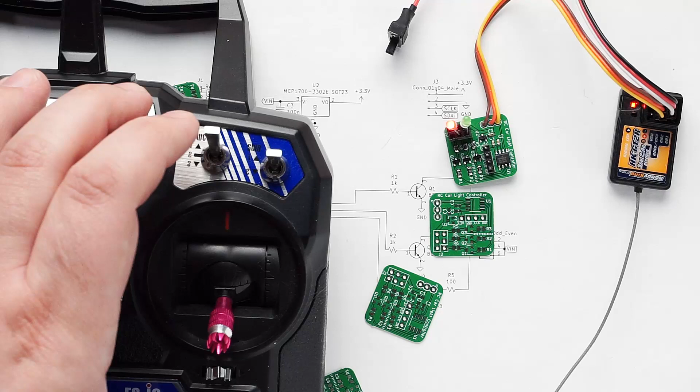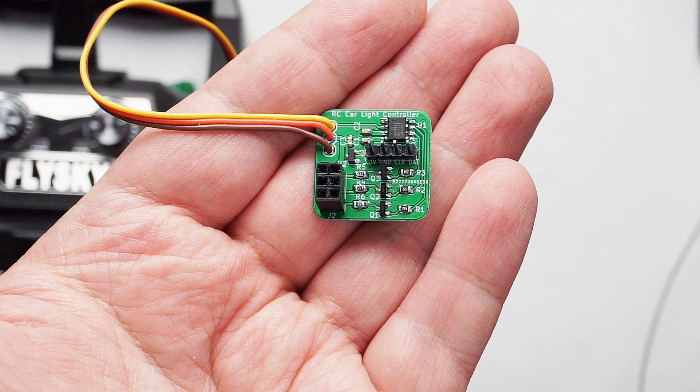Finally it works. Hello, what I was doing there was testing a light controller I made for RC vehicles and robots. I'm controlling some LEDs, but the same method could be used to control more complicated things as well. The main point of this project is to get the signal from the receiver to the microcontroller.

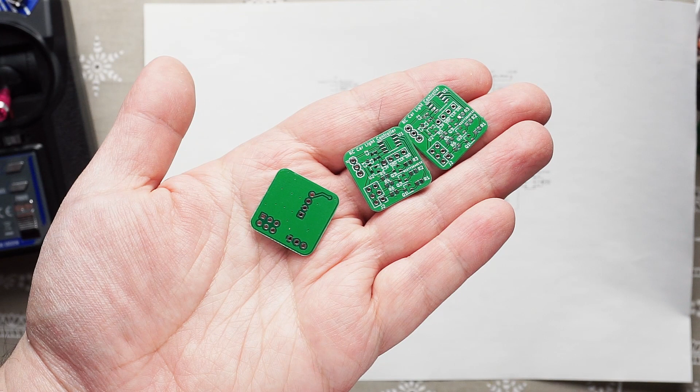The microcontroller in this case is a PSOC 4 chip. This board also includes a 3.3 volt regulator and 3 sets of transistors and resistors for external LEDs. I designed this PCB to do one thing, and that is to control 3 sets of LEDs. If I have an RC car that drives, I can add this circuit with LEDs and have controllable headlights.

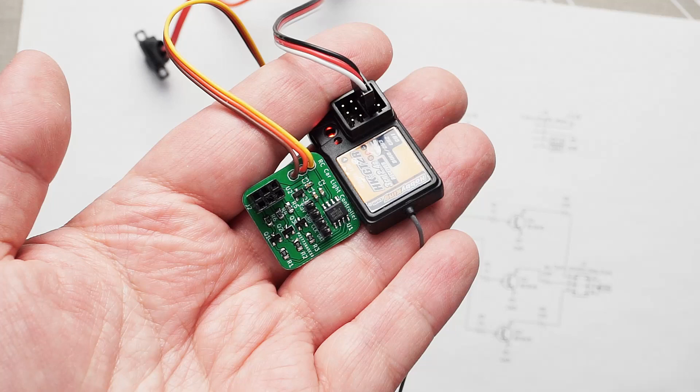By following this video, you should be able to read the signal from the receiver with the PSOC chip and use that information in your projects as you will.

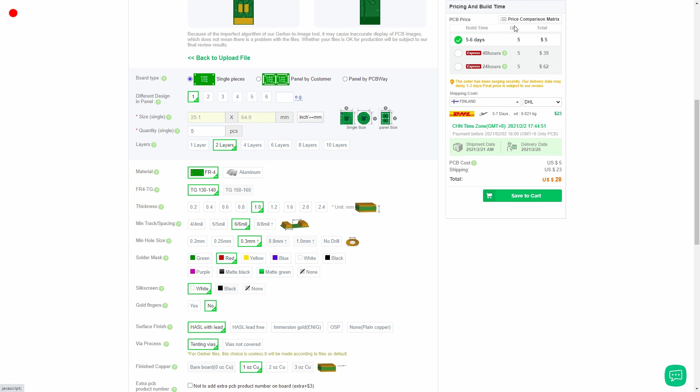I really like the PSOC 4 line of microcontrollers from Cypress. This cheapest PSOC 4 chip doesn't have many of those advertised advantages of most other PSOC chips, but it is still a 32-bit microcontroller that can be configured using the same PSOC Creator IDE, which I like.

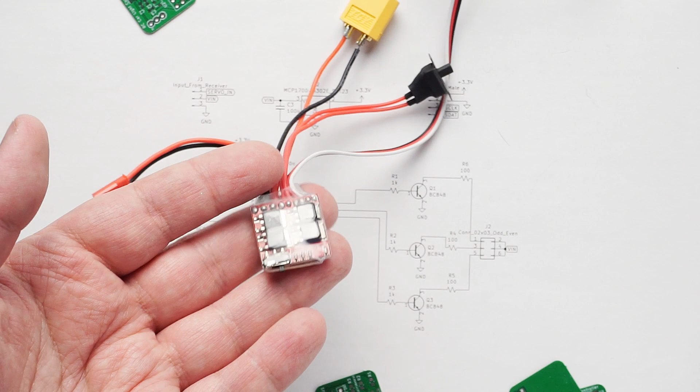In case you are not familiar with RC devices, the RC receiver outputs a PWM signal with pulse width between 1 millisecond and 2 milliseconds depending on the position of the switch or potentiometer on the transmitter. This signal is good for an electronic speed controller or servo motor because they have a decoder inside them translating incoming pulse length into a certain speed or position. But this signal isn't any good for driving LEDs, not without some kind of decoder in between.

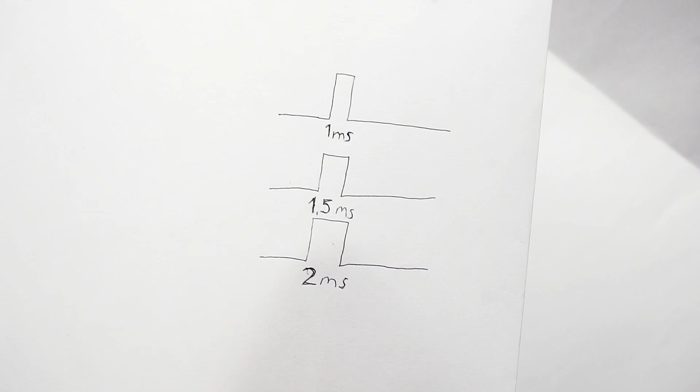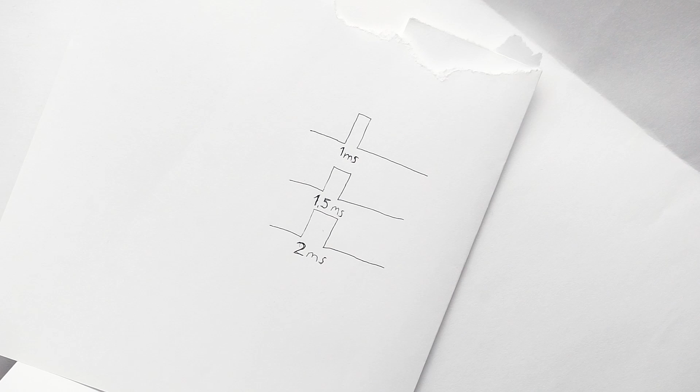Thankfully, this signal is simple, so we can read the pulse length and use that as a variable in our microcontroller's code. In this case, I'm going to set up the input signal to control the timer in a way that will trigger an interrupt at the falling edge of the pulse, and the pulse length is available immediately after the interrupt. Hardware will handle restarting and reloading the timer. In the code, we just read the pulse length value and use it as we want.

So let's get started with the software. In PSOC Creator, let's create a new project, select the correct device and an empty schematic as a starting point. Even this, one of the simplest PSOC chips, can be configured using this schematic editor by dragging components from the list to the schematic sheet. For this project, I need a timer in capture mode. Timer can be found under Digital and Functions.

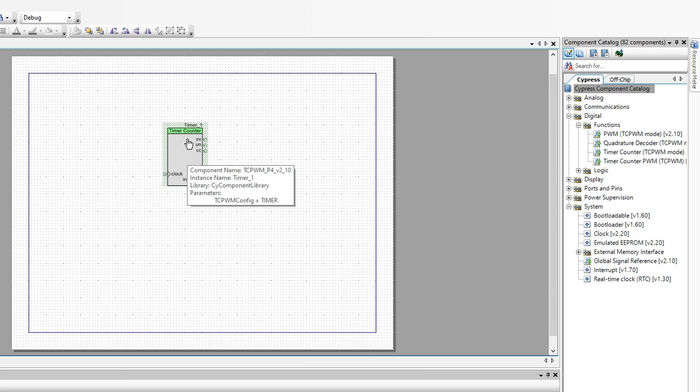This timer will be used to measure pulse length. Run mode of the timer should be one shot because it only runs during the pulse. Rising edge on the input should reload the counter with 0 and start the timer. Falling edge should capture the current value of the timer and stop it. I need to expose reload, start, stop and capture pins to the schematic. Stop and capture inputs should be changed from the default rising edge to falling edge to match our requirements.

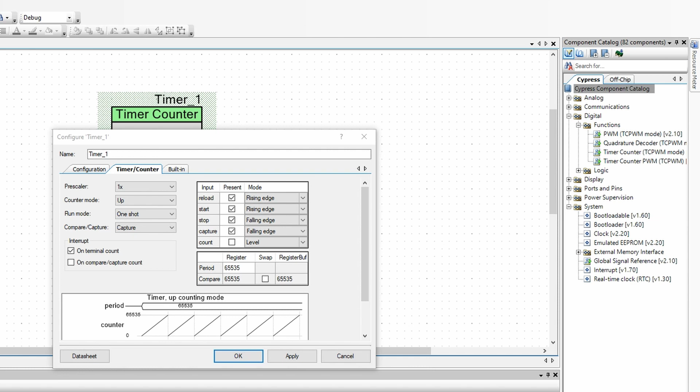I will also change the interrupt settings to trigger interrupt on the compare/capture count. This component needs a clock as an input. It can be found under System. The frequency of this clock isn't all that important, but it affects the captured counter values later on.

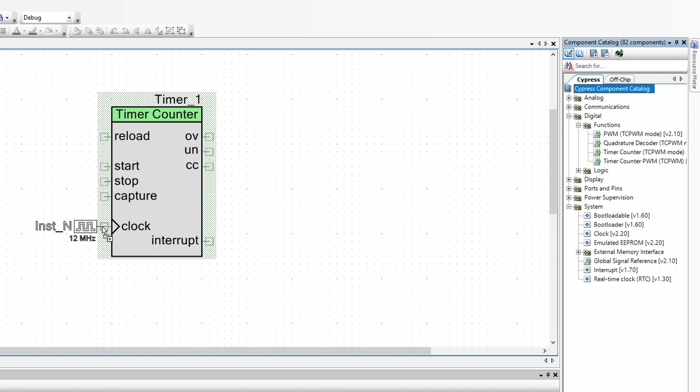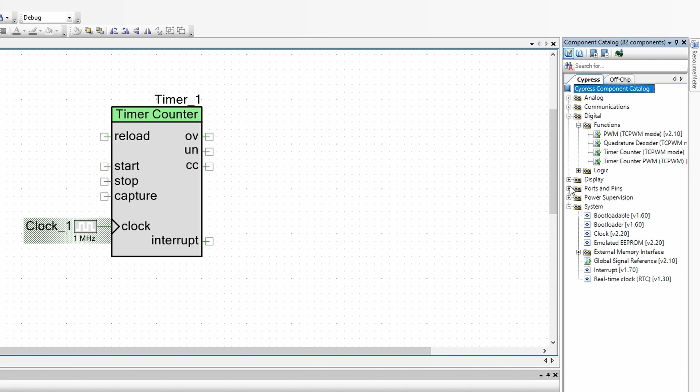I decided to use 1 MHz, so 1 tick is an easy to understand 1 microsecond, and thus servo signal will be represented by counter values from 1000 to 2000. The timer is now set up correctly and I need to add input and few outputs. The input can be digital input pin under ports and pins with its default configuration.

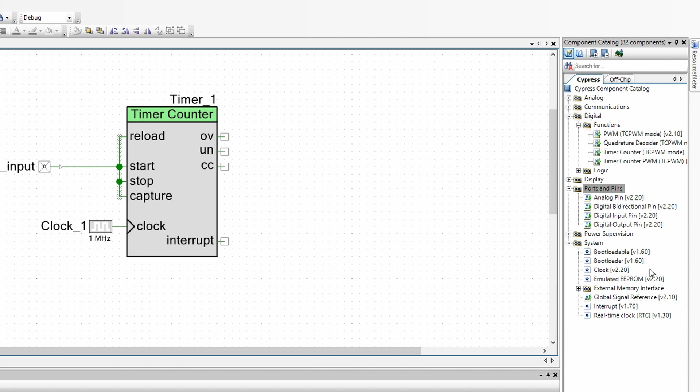The same input signal will control all the functions of this timer component, so I will connect reload, start, stop and capture inputs together and all those to the input pin. Last thing I need to connect to this component is interrupt, found under System. Changing the name is recommended for clarity, nothing else needs to be changed.

At this point, the timer component will measure the length of the pulses on the input pin, and the length value is available after the interrupt triggers. What else is needed depends on what you want to do with the circuit. In my circuit, output will be for 3 sets of LEDs. I will add 3 output pins, but I will disable hardware connections in configuration because they will be only controlled

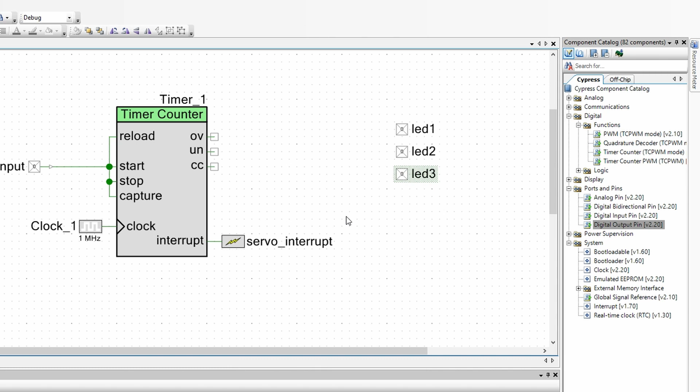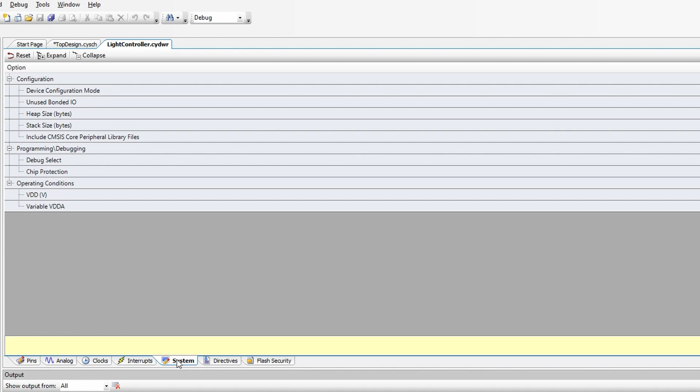in the software side. Now I have input and couple of outputs, and I can select which pins of the IC those are in the Design Wide Resources. In this Pinout tab, it's clear that debugging interface is using 2 valuable pins. I can use those pins as I/O pins by disabling the debugging interface in the System tab of this Design Wide Resources window. I'll change the debug select from SWD to GPIO. When I go back to Pins tab, those pins are free to be used for other things.

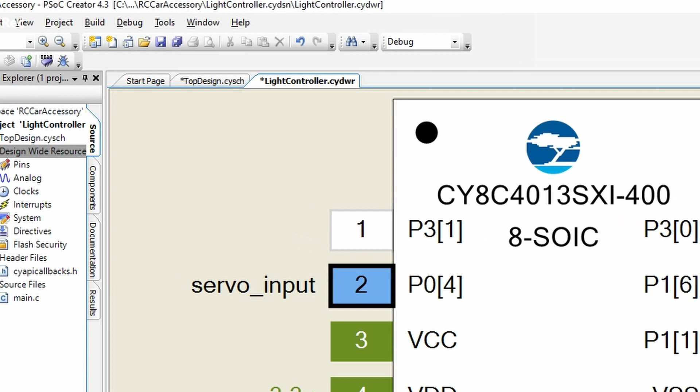I will start assigning the pins starting from the most specialized function. The input signal is used as an input for the timer component, and when selecting which pin it should be connected to, there's only one option, which I will obviously select. The outputs are just GPIO pins, and there are no restrictions on which I/O pins I could use. I'll select the 3 free pins on the right side of the chip.

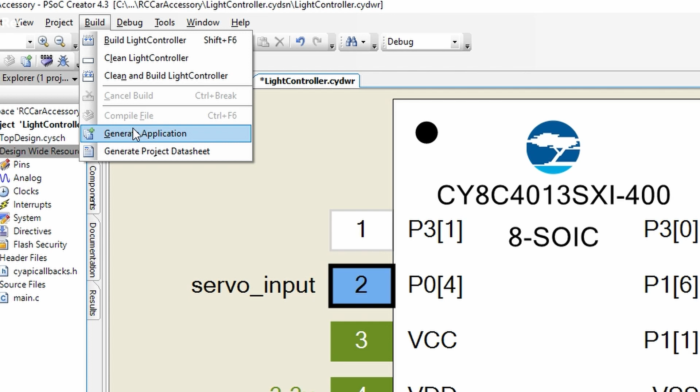After making changes in the schematic editor or Design Wide Resources, it's a good idea to go to Build menu on the top and click Generate Application. This will check your design and update the APIs so the component and function names get recognized in the code editor. This will include and generate the sources reflecting your design choices. These hardware configurations I've just made are doing the heavy lifting.

In the code I need to write interrupt service routine to get the measured pulse length. Inside the ISR, I will read the captured timer count and set the state variable based on the value. To prevent interrupt from triggering repeatedly, the interrupt needs to be cleared inside the ISR. In the main function, timer needs to be initialized and the just written ISR needs to be assigned to the interrupt. Then I can control the LEDs in the endless loop based on the variable set inside the ISR.

The main thing I want to share with you is measuring the pulse length using PSoC's timer component. I hope this was helpful if you had problems with this application.